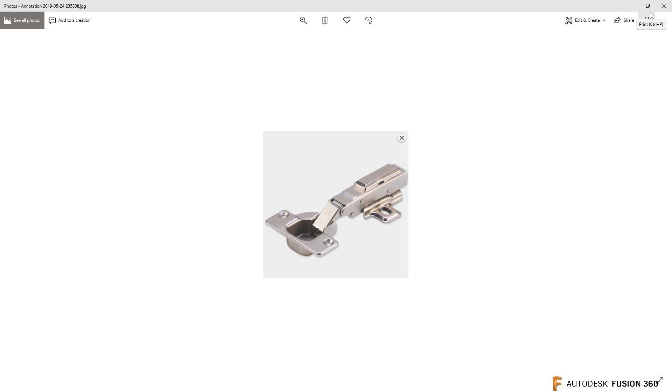So what I would recommend doing is I would actually not model this up from scratch. If you can, go ahead. But I would absolutely go to Insert and go to Insert McMaster. Because if you go in here and you search hinge, now again, I don't want to encourage anybody to cheat on that test, but there are actually cabinet hinges in here, which is pretty much what you are looking for. And there's all different kinds in here.

You can kind of filter down the different ones, but here is this same type of style, I think, that was shown. And if you go in and look at those, whenever you see CAD for digital drawings, you can actually find one of these hinges. So if you click on whatever size you want, you will see there's all the different sizes. You click on the part number, and you click on the product detail right here.

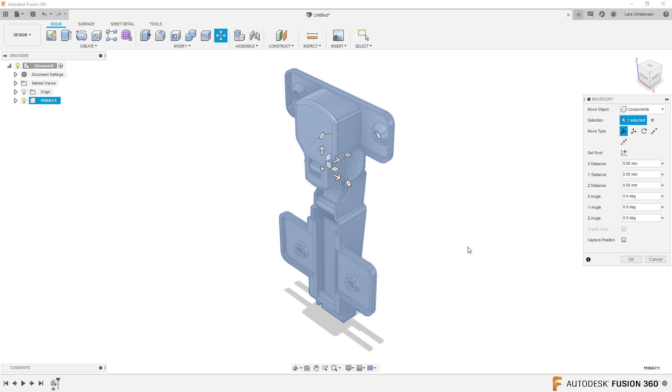Then you can go in, and if you scroll down, you will see here that you can download them as a STEP file. And if you click that, hit save, then it will actually appear on your screen inside of Fusion 360. And you can see they are very detailed in here. Now, they are coming in as a component with a lot of bodies in it.

Making a toggle clamp move in Fusion. If you go and you search on that video, this one here, Fusion 360, make a toggle clamp move, that will show you exactly what I would do to make this one move here. So that's my answer to the first one here.

Behave, I'm sorry if I'm pronouncing your name wrong. That's what I would do if I was working on a project. And again, I'm not encouraging you to cheat, but I will tell my teacher that, hey, that's how they will do it in the real world. They will go out and borrow the model and then make it move with all the different joints. Hope that was useful. Let's move on here.

So if we go back into the list here of the latest videos, we did a video last week that was how to create a custom CAM tool within Fusion 360, and this was Alex who sent me an email and says, hey, how do we create a custom tool? And we ended up creating a custom tool that in the end we could simulate running down the part here.

But I didn't answer Alex's question all the way. So I should have read a little bit further down. Sorry if I'm not reading these emails all the way into the detail. But pretty much what Alex was trying to do, if I understand your email correctly, is to actually take this T-slot cutter and cut down in a piece of wood, so kind of like sinking it down, and then cut a blind T-slot hole and then get out of it again. So just plunging down and go out.

I'm assuming you're doing this in wood because I couldn't imagine that you could actually do this in steel. I could be wrong. I'm definitely not the world's best CNC machine guy out there. But let me just draw up what I think Alex wants, because I think a lot of people would love this. I can show you a couple of cool tricks. So I'm going to start a sketch, and I'm going to use a center rectangle, making sure it's centered, just to make my life a little bit easier.

I'm going to do a center rectangle, and let's make it like 300 by 100 wide, maybe. That should be okay. Press Q for press pull, and let's extrude this up 50 millimeters. Doesn't really matter. Now, here's the thing. This can actually be helpful when you're trying to model. If you're a machinist or CNC programmer, many times modeling things up the same way that you would machine it can be helpful.

So I think, all right, I'm going to plunge down with this T-slot cutter. So I'm going to create a sketch on the top face here. C for circle, and that's going to be a 50 millimeter diameter. That was the cutter we created in last week's video. If you go and look for the custom tool, you'll find it. I'm going to hit Q for press pull, and go down minus 20 millimeters. Okay, so we just have a hole here. If you have used Fusion more than a few weeks, you should feel pretty good about this.

Now here's the cool thing I wanted to show you. So this is the tool just going down in Z, just plunging right down. Now we're actually going to have it moving in, I guess that would be the Y direction here. If we spin it around a little bit, we got the Y axis, so moving down here. So what I'm going to do is I'm going to open a sketch.

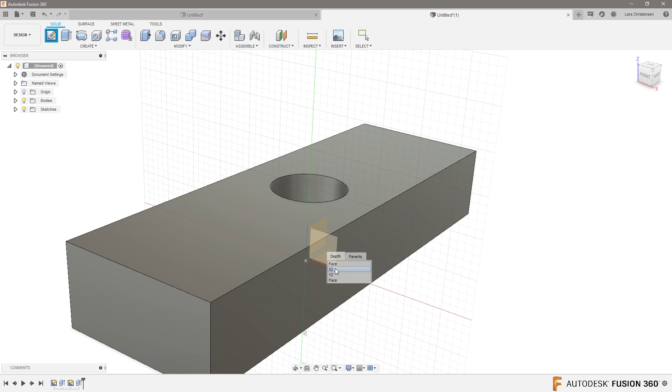And by the way, you see how I can't select the planes because the block is in the way here. Many times, and I do this too, you might just go up here and click one of the faces and find it. But if you hover where the plane is, you can see that the side of the block is selected. If you hold down your left mouse button for just 2 seconds, this little dialog box comes up, and now you'll see that I can find it right there. Click on that, and it's ready to start a new sketch.

Now here's a tool that I don't use often enough. When you start a sketch, remember, we're actually sketching right there inside the center of that hole, right? If you didn't know this, there is, in your sketch palette when you are in a sketch, a slice command. See what that just did? It just slices. It's all visual, it doesn't do anything physical, but it makes it a little bit easier to see what you're doing when you tick that little box.

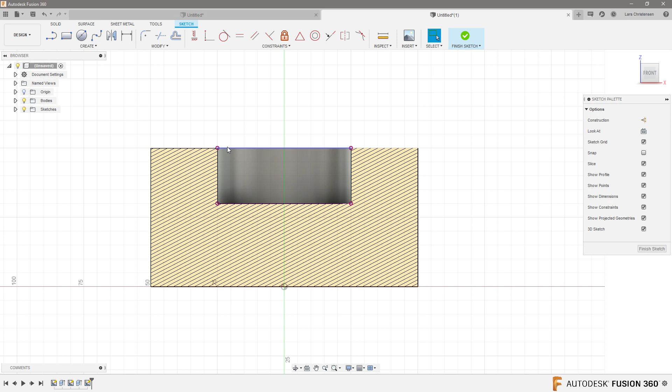All right, so I'm going to go normal to again, and I'm going to select P for project, and select that in half of this hole here. Hit OK. That will give me the endpoints here. So now I'm going to do the bottom side of the cutter, and that's going to be 10 millimeters tall. That's how big that cutter is. If I just hit OK, the box can move back and forth. We could do a vertical constraint from this point to this point. Boom. So then we have that there.

And then we're going to do the shaft. Now, Alex, I'm assuming that you have some kind of a cutting edge on the shaft, or you're going to have problems, but maybe you do. So let me just draw a rectangle out here in space. This is another thing I many times do, and it doesn't really matter how tall I make it, maybe 25. The width, I remember, was 20. I just draw my rectangle out here, and then I can use something like the midpoint constraint to put it where it belongs. I hope this is useful.

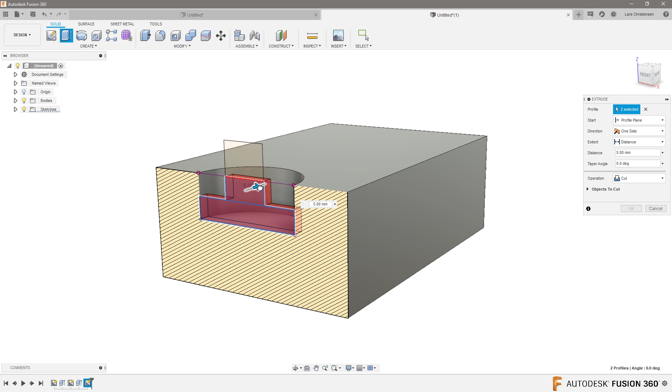So now we have that profile of that T-slot cutter. Now if I hit Q for press pull, I can select these 2 sections here, and make that cut that the T-slot cutter will do, right? So I'm going to go in about 5 millimeters cut right there. If I hit OK, you can see what we got here. So we plunge this down with a T cutter, and now we are cutting along Y. But of course, it's a round cutter, so the end here is not right. So let me just do that.

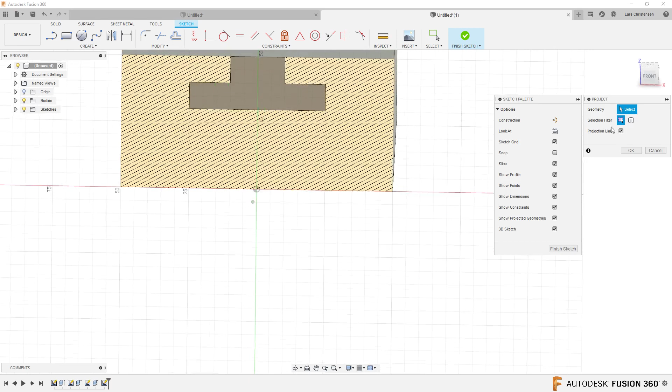So I'm going to open another sketch on that face, and I'm going to use that slice command again, because now that I remember it, I actually like that, because I can see this here. I'm going to use P for project again. When I go in here and select this, I can select this profile here, so I can get that line there. I just really want this line right here.

And then if we hit L for line, we can draw a line down to that endpoint there, because having just added that line should let me go into a revolve and select only half of it, revolve around that vertical line I just did, and that will make that half of the cutter there. If that went too fast, I apologize. This will come out as a recording. Go back and watch that recording.

If I go into the tools, into inspect, and do a section analysis, maybe that would help, right? So if we just do that for a second, the cutter's going to cut down and it's going to cut over to the end piece here. So this is the profile of what we want the cutter to do.

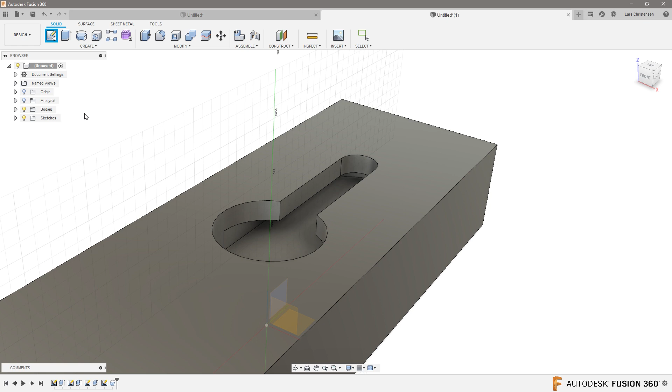Let me just turn that off again. Okay. So far so good, Alex. So now we want to use that T cutter to plunge down and machine over. And my one original thought could be if I just went back into a sketch tool and draw a sketch on the bottom here and hit L for line and draw a line from the center point of the big hole to kind of the center point of the little hole. This is kind of what I want the tool to actually

move down. So now, if we go into manufacture, to our CAM, and I'm just going to make a setup, and this is why, if you wondered before why I drew everything in the centers, because now my origin is, I don't have to mess with that. You could think about going in and use something like the trace tool here. So the trace, let me just do that again, that was a little fast. On the 2D, go and click Trace.

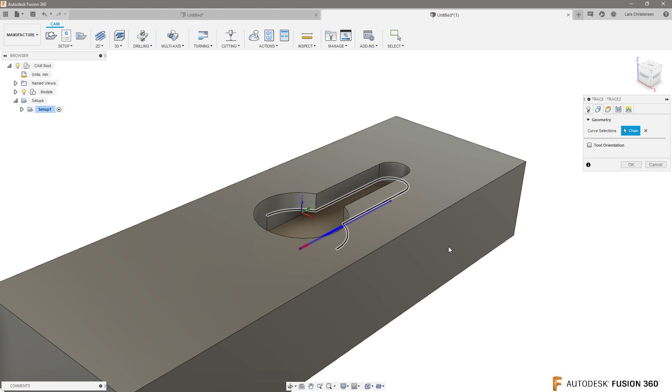And now, if I go and select that tool, and I still have that from last week's video, so Alex's form mill, what has like this T-shaped cutter here. If I select that, and I go to our curve selection, and I select this edge, and hit OK, let's look at what we get.

We are almost there. If I go in and simulate this, and I'm just going to turn it down a little bit in speed, it's going to plunge down, it's going to machine over, and this is everything I think Alex wants, except the last thing, what is that is actually rapiding out. See, this could be all good, going up again. The going up is not good. Can you see that? It's machining down, it's all good. Going up is not good.

And I'm assuming, Alex, that you have some cutting edge on this, or you're going to have to machine yet first. Now, if this is true, if this is what you really want, except the z-axis move up, then I'm assuming you're machining in wood, because I could not imagine that you could do this in steel. I just couldn't picture that, where the chips would go and all that stuff. I think that could be an issue.

Now, and it's important to remember too, I think. And I know I say this in a lot of these, but the CAM inside of Fusion 360 is based on metal subtractive, standard CNC kind of milling. So I think that's important. So if you are working with wood or other materials, you're kind of aware of that, because you might have to think a little bit different in those materials.

Now, if this was steel, the way I would do this was I would actually use a cutter that was smaller than what you're trying to machine. Because like I said before, there's a couple of things when it's steel. First of all, you need to get rid of the material. You would also need, normally you want to lead in and lead out, where the cutter actually comes on and off the cut.

And just to show that, instead of changing the tool, because that was kind of created already, I'm going to do it with making the hole a little bit bigger. But Alex, I'm going to come back. I'm going to show you how we could cheat and do this with the trace tool. But let me just show the other one first, and hopefully I'm not making things too confusing. So I'm going to just suppress the trace tool for a second.

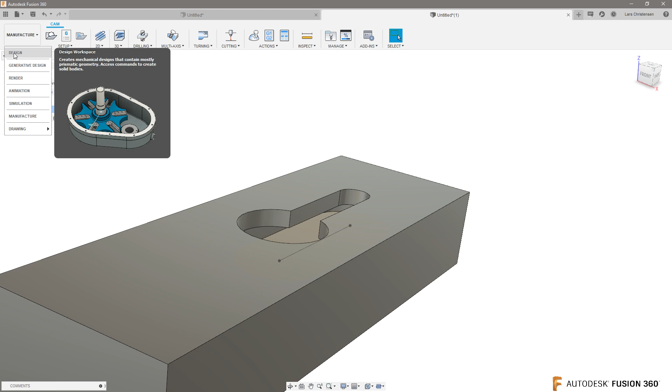And let me just go back into our design, and let me just change a couple of these, because you would have to have either a cutter that is a little bit smaller, or of course something that is a little bit bigger than your cutter. So I'm just going to go in here, and I'm really just going to change a couple of these dimensions here, because Fusion actually knows where and where not there's material. So let me also just change the width of this. So that's making everything a little bit bigger.

The way I would machine this normally would be probably just using a 2D contour toolpath. Still use the same cutter that we had before, but now I've made everything bigger. Then I will just select that bottom edge there, and let's just hit OK and see what we get.

So when we do that, you will see that we get a warning on it, and whenever you're getting a warning on a toolpath, right click and hit show log. And it will give you: contour was not machined because the given lead parameters would cause collision. See, this is one of the cool things about Fusion and being inside of a solid modeling tool. It actually knows it will collide.

So let me just go into the 2D contour, hit edit, go to the last tab, the linking tab, and let me just turn the leads in and leads out off. And let's try again. And now you will actually see we don't get a warning, and if I click here, you will see that we got some bytes, which tells us it's doing something. So let's simulate that. It plunges right down where we don't want it to.

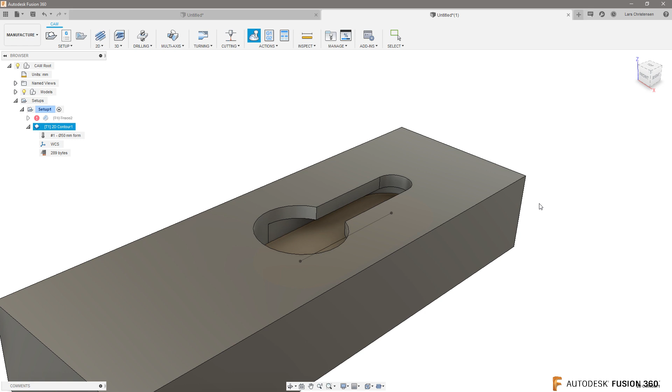Okay. So let's go back in, right click, hit edit, go back to the linking tab. Now down here you can actually do an entry position. So let's select right there, hit OK, and let's see what we get now. So this would actually probably be a better toolpath.

Now, you will normally have a lead in, lead out on your parts. And that lets you do cutter compensation in the controller of the machine. But you will actually find on most of your machines, at least in my experience, you can go fairly small in your lead in, lead out. So the default here was 5 millimeters. If I change to 0.5 millimeter, you will probably see it will actually let us do that. But what that will do, if I zoom in, is the green will give you like a little lead in and lead out. That, at least if it's steel, is probably a little bit better way to do that.

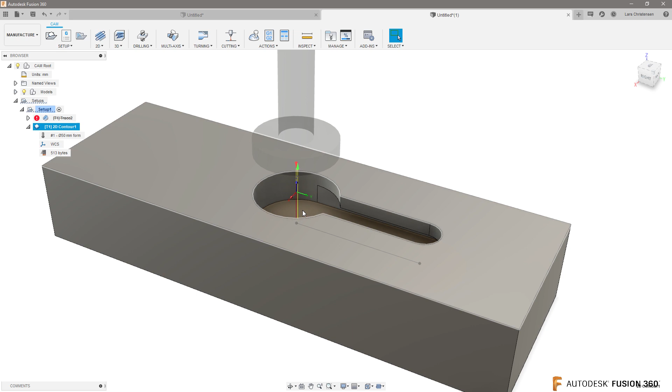And again, Axel, I'm assuming certain things. I'm assuming that you have a cutting edge on the flute here, or you would have to remove this here with a previous operation, which you maybe already have considered. But this here would be a better tool path. I do get a red collision going up. But the fact that it has a lead in, lead out, and it's smaller than the exit opening, with the material maybe going somewhere, something like that. Okay, so I got that out of my system.

Let's go back to the tracing operation again, though, because I do want to show you something that maybe is useful. If we go back in and we unsuppress that and just regenerate it again, still the same thing we have right now in that tool path: if I simulate it, it's going to go down and go on, and then it's going up. And this is what I think you want to get rid of. You want to get rid of the up, per se.

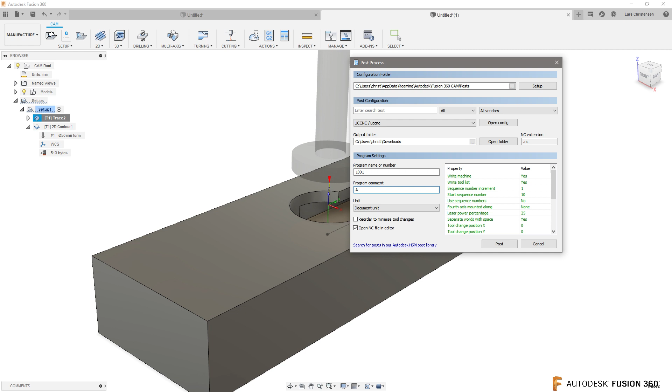Well, you could actually do this in the code. If you had to do this every single day, maybe this is not the right way to do it, but if you're just making a few of these, we could right-click here and go into the post-processor. Now, with great power comes great responsibility, but I'm going to show you anyways. Let's change the name. I don't know why we have Nathan in here. So Axel's, I'm just going to post this code out here. And of course, this is a tiny little piece of code. But to do that trace tool path, this is what the machine needs.

And when you get past the G54, turn coolant on, turn heights on, it plunges down in this line, and then it goes Y80 millimeters right here. That is actually when it's traveling across there. Let's see if I can move it down a little bit, like that. So this line here, line 18, Y80, that is when it's traveling to there. Then you will see the next one is Z up. Well, Z up means that it's just going to travel up 4 millimeters, and then it's going to travel up another 15 on top of that.

What we could do was we could go in here and click on this, hit enter, and enter our own line. And if we here wrote Y0, because that's where it started out from, 0,0, that actually means that now it's going to go up, and then it's going to go back again. Now, you will not see it inside of Fusion. You will see this on your machine.

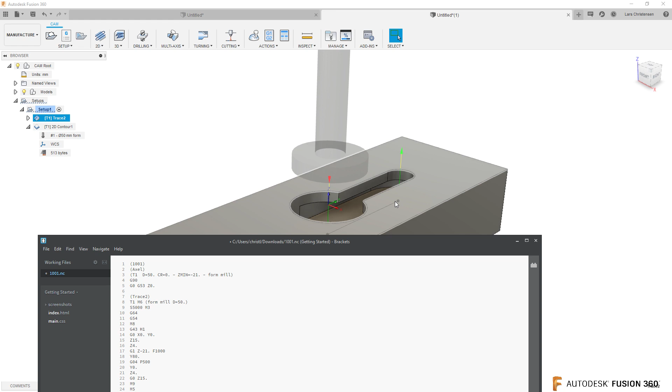And you might even consider, if we make a line between those two, the Y80 and the Y0, if you did something like G04, that's a dwell, and we did like P500, that will, depending again on your machine, give you a half a second. A G04 will give you a dwell of a half a second. So that will just let that cutter go Y80 down and just sit there for a half a second to make sure that it spins around a couple of times before it goes back again. So you could get around it by doing it this way here.

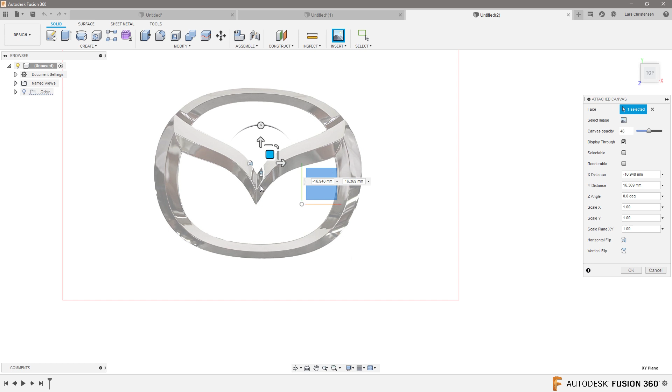And of course, when you bring it in here, we talked a lot about logos, you get an option to manipulate them in here. I'm a big fan of doing the opacity level here, leave that around 50 or so. And another thing that is good, if you move it around, is to get that origin situated somewhere; that can be kind of helpful. So what I wanted to show you, JC, is that instead of using lines and arcs to do these kind of things, you're probably better off using the spline tool.

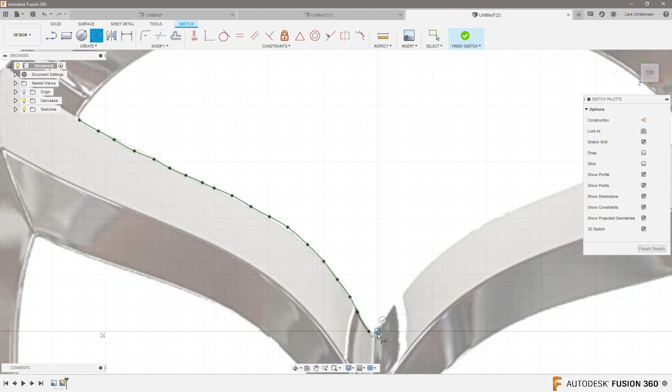So if I go in here and create a new sketch on this face here, the spline tool is a little bit better. Now, what many people will do with the spline tool is they will click on the spline tool and then select somewhere around here and start clicking around multiple times. I think that was how we used to do it in the olden days maybe. So people trace it around like that. I actually am not a big fan of doing it like that. Control Z to undo. Let's go all the way back.

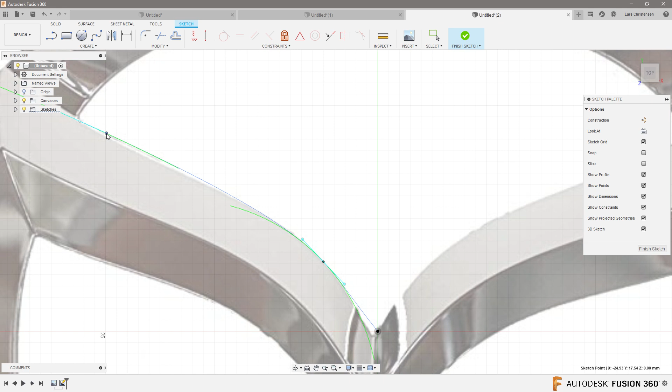What I will do for this one here is probably just click once and then might click twice. Might click here and then one down here near the bottom. Probably right around there and hit OK. Because what you get is these handles, and they are much better to control the spline width. And you can kind of adjust them. The more you get of these, the harder it almost gets. But this would be one way to play around with the spline here.

Now I didn't do a very good job placing the canvas on that origin, did I? That's probably better right there. So I would adjust these spline handles as you're seeing here. Let's go back and edit it again. I would be playing around and try to match this up with our point here and get it as close as you want.

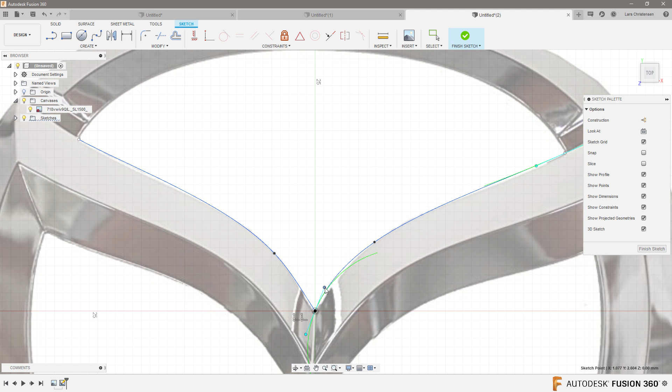When you got this all the way around, now these, I always talk about how you're going to turn your, yeah, let's just do one more. So I would do one for there, and adjust that one to be somewhat close to, see, that's pretty good.

I'm always talking about you have to fully define your splines or your sketch geometry. But for splines, I actually don't do that. Let me just get the last one here. So you get that, JC? This is how I would trace around each of those. Yours is a little bit more complex than this.

But then in the end, when I've done this, I would right click on each spline and I would fix it. Fixing the spline in the end is a much better way than trying to fully define them. Oh, I'm not sure I got this one fixed, but whatever. That's how I would do that, JC. That's how I would go ahead and work with that. Hope that was useful.

Another option could be if you can get your logo. Your logo looks like it's a pixelated image. You could use something like Adobe Illustrator or another program that can convert from raster to vector. That means you can break down a picture that is all pixels into actual geometry that is lines.

And then you can bring that SVG file into Fusion by clicking insert and bring that SVG file in right there. That's another way to do it, if you don't want to sit there and trace it around. A couple of different ways to play with it.

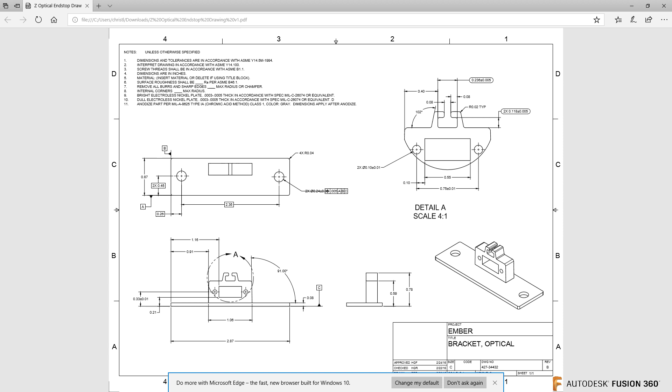You can see that, okay? So what I could do was use something like this snipping tool inside of Windows, and I could just grab this 2D drawing like this, because a PDF, unless it's special, is not really better than a picture. So let's just hit save, and leave it as a JPEG capture, just so you see it here.

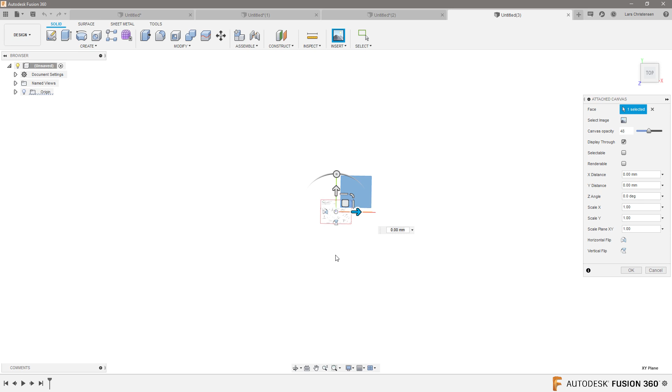So now inside of Fusion, what I could do is use it as a canvas as we used before. So I'm going to go over here and click insert as a canvas and bring it in just like we did with the other ones. Now it's a picture. Now I'm going to do a couple of things in here with it though. I'm just going to place it in here for right now. Hit OK. Find a reference.

Ooh, and this is not millimeters. This is inches. So I'm just going to switch my unit over. It shouldn't change anything for what we're doing here. Change it over to inches.

When you're bringing this in as a canvas, you can actually right click and calibrate that canvas. So if I click right inside of this hole here and inside of this hole here, I can type in that 2.36 you see right there. That will blow it up much bigger. So now this drawing is potentially pretty dang close to my actual file.

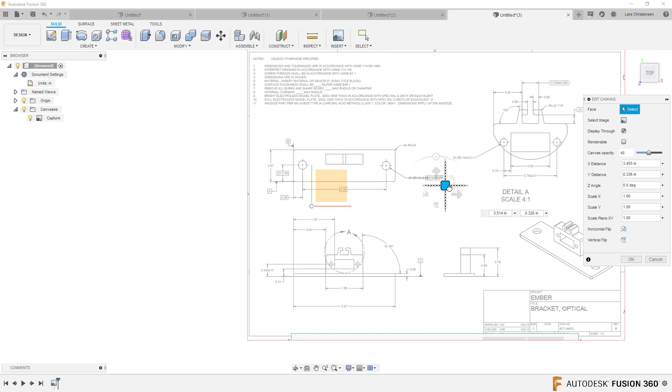Now I will right click again, hit edit canvas, and turn my origin on. That's my origin. And I will move this one over close to one of these views. A print like this, if you're fairly new to mechanical prints, has different views. So this is the top view, there's a front view, and there's a side view on this bracket, whatever this thing is. And actually I just noticed that I think we are missing a dimension on this for where this island is. Alright, that's for something else.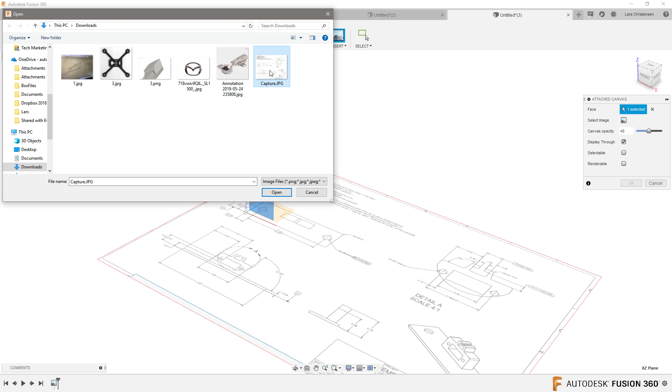So what we have now is this PDF brought in. It's sitting on the top view. It is to size, because we just used that calibration function. What I would now do is bring in another one. Insert, attach canvas, select the front face here, select the same file, hit OK, and again I'm going to hit OK. And now that is sitting down there.

Now this actually adds a canvas. I actually need to flip the orientation, I think. It looks like the orientation on this one is wrong. If I click on this one, that will make it go that way. There you go. You can flip the view on these two here. You'll see what I mean in a second. Alright, so this is the second one. I'm going to hit OK to that. I'm going to do the same thing to that one.

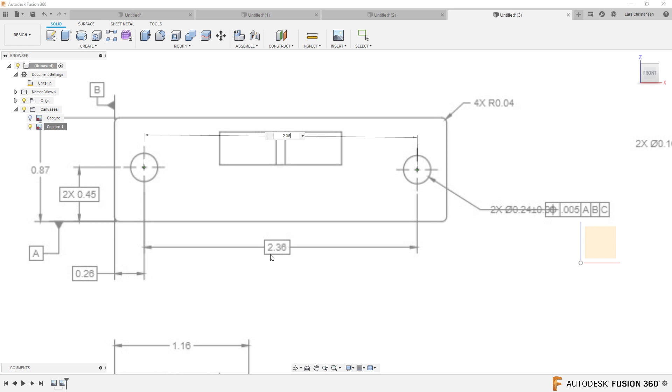I'm going to turn the first one off. That's a little bit hard to see. I'm going to calibrate that one also, using the exact same dimension I did on the first one. Click this here. Get as close as you can. Again, that is 2.36, that dimension right there. That's going to blow up.

And then I'm going to do the same thing. I'm going to use the same corner, but on the view I want to use. So instead of placing the origin on this edge, I'm going to do it down to this edge, because that's the front view we're on right now. I hope this makes sense. Hit OK. So if I now go back up to an isometric view and turn the first one on, we have the front view lined up. We have the top view lined up.

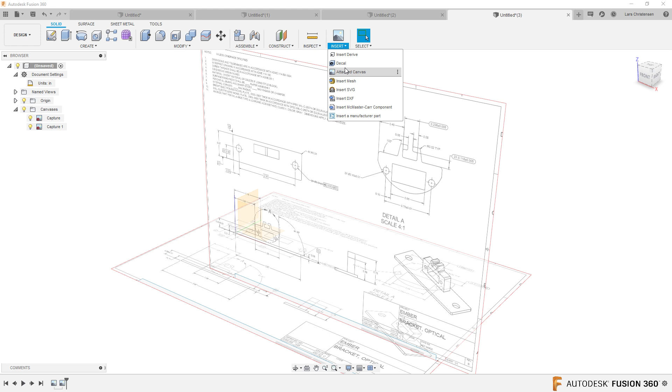We could also line up the last view, depending on if you need it or not. We're just going to do it for this exercise. So we're going to insert one more time. Last one, I promise, friends. This one again. Hit open. So that comes in. I'm going to turn the first two off again because it's a little bit hard to see. Let's zoom in. I think that is the right one. Oops. Go back over and look at it. There it is. Let's right click, calibrate.

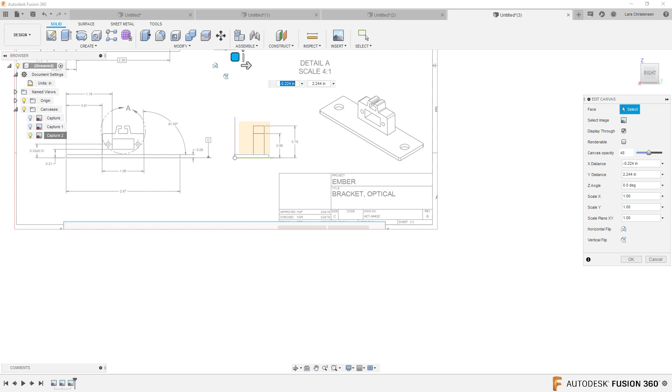Like that, 2.56. And this one here, when I right click and hit edit canvas, it would actually bring it up to this view. Now, one little tip: if I was going to do this in real life, I might actually just delete the other things out of here and only keep those three things we really need.

So let me just rephrase, right? If we go to the top view, we really only want this section here. The front view, we probably only really want this view here. And again, the side view, we only want this portion right here.

Using this technique may take a little bit of work up front, but it has made me catch things in the past that I missed, versus just having a paper version laying next to my computer and referring back and forth between the two all the time and missing something. So I think this is a pretty good way to do this.

So what we could do now with these three canvases is, and you maybe have figured it out, open a new sketch, click on this one here, and draw up a rectangle. Now, I would still use the dimensions you see on the print. So 0.87 for one, and the overall size of the other one is down at the bottom view, but it's 2.87, like that. So now we have that there.

There are some holes, C for circle. So place a hole here, and the hole is 0.24, like that. And then D for dimension. So you see what I'm doing here? I'm just using this PDF as a reference to draw up this circle.

C for circle. I'm going to draw another circle over here. Then I would do an equal between this circle and this circle, and probably a horizontal relationship between them. And then D for dimension, and the one we have been using a couple of times here is 2.36, right? So I'm modeling right on top of this. I know for some people this is going to seem a little silly, but to me this has been an extremely helpful way to do this.

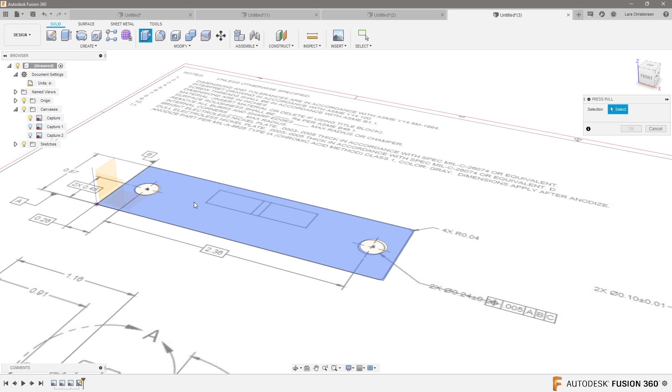Now you can continue, and we could go down. The thickness of this is 0.08. So here's Q, extrude 0.08. So that gives us this view here. Now, if we turn that off and go to the next view, see how we have the next one sitting right here?

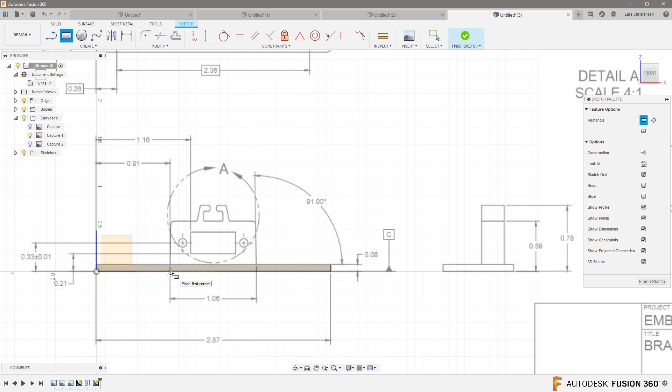I could open up a sketch on this front view here. We could do all the details because there's a detail view up here, but let me just draw a rectangle here using the dimensions, actually from the bottom up. It is 0.78, D for dimension. And what are we looking at here? The width here is that one right there, so that's 1.06. So you see how I'm using this as a reference.

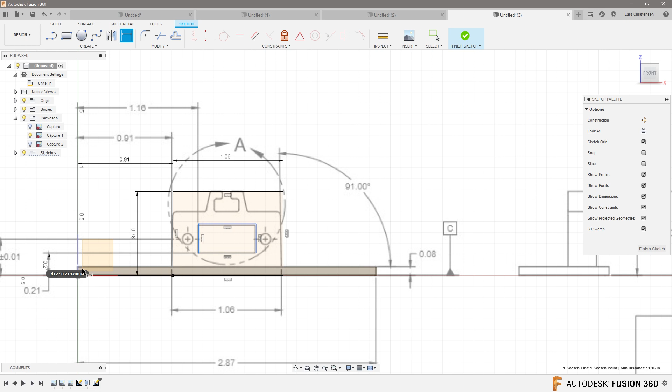There are some dimensions here. The dimension from here to there would be 0.91, right? So now that is in place. We could do the opening inside of it. C for circle, draw that circle up there, and from the bottom up that is 0.21. And from this edge to there is 1.16, right? So you see how we're placing it.

Now maybe we have to go over to the detail view to see it's 0.55. There are some things missing on this print, though. 0.55, like that. And what's the overall width on this?

I think that's missing. Oh no, that's this one here probably. From the bottom and up, goes over there. 0.59. That's not true. That's the top. Yeah. So we're missing, I don't know what this one's gonna be. We're missing a height on this one, I think. We just leave it here.

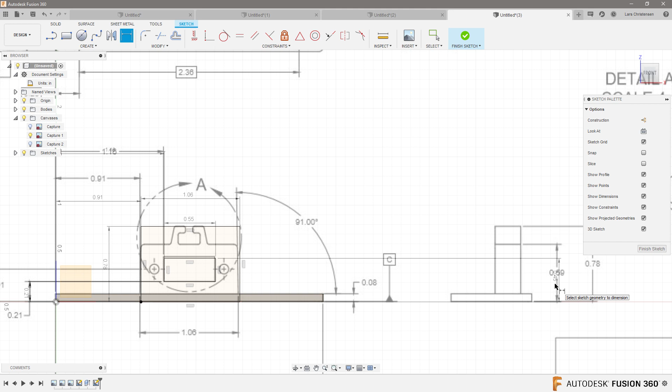Now the last view, and I did this kind of on purpose to show you. See, if I turn it off, you see how this sketch is sitting here? But if I'm turning on the last view, you will actually see that it's offset. It starts over there. And that dimension is missing. But just in case you didn't know, if I hit Q and I hit that, you see how we can do that there. Did you know that in the standard extrude function, we can actually do a starting offset from?

So if I do like 0.5, minus 0.5. See how you can actually offset that? So if you go in and look at there, maybe it's not 0.5, maybe it's 0.457, I don't know. You can play around with this, but if you didn't know that, you can offset that in. And I don't know what the thickness is of this one either. 0.258, close enough. Minus 0.258. All right.

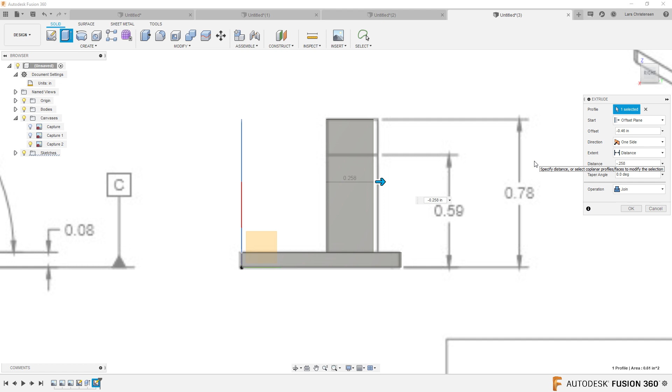This is one way that you can start using PDFs inside of a file to draw things up. And of course, if you're missing dimensions, David, like I do here, you probably have to call the customer and make sure that you get that straightened out. But if you have all the dimensions, this way of using PDF files is something I have used multiple times when I'm modeling things up. And even if you are a bit of a pro, this is a great way to catch those things. Like I'm doing here, suddenly you realize, ooh, I'm missing this dimension. It's actually an easier way to see it, I believe.

I do not, but I might be able to help you. If we go back in, let's start a new file here. So one thing about the mirror command. S key, let's do something that is 200 by 300, Q, press pull, 20 millimeters thick, so we have a plate. There's a couple of different ways you can mirror, right? So I'm going to open a new sketch here, and I'm not going to fully define this. I'm going to extrude this up. Yep, that's fine. Let's add some fillets to it, just to make it a little exciting.

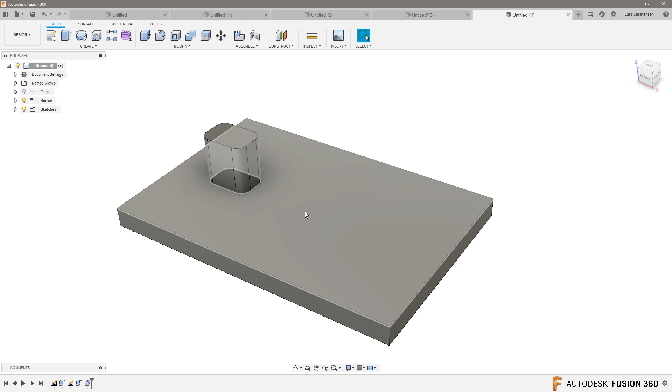Okay. If you use the mirror command here, first of all, you get different options in here. You can select faces. That's kind of like the default. If I select faces, I can go around and select all the different faces that I want to mirror. I think that might actually be purer for Fusion to calculate. But what I prefer to do is selecting features. It makes it easier for me so I don't forget to select something, because now I'm just going to select it down here. So I'm going to select these two features to mirror, a mirror plane, that could be this one here, and it will come over here.

Now, this is maybe what to play with, John: there are compute options in here. There's one called optimized, one called identical, and one called adjusted. You might want to play around with these, and it comes down to how Fusion is doing the calculation.

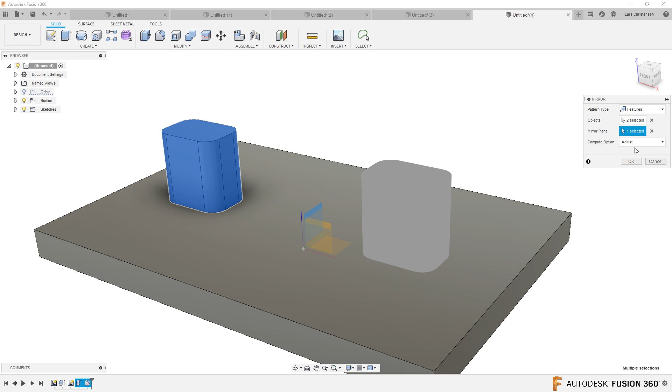Now, to my knowledge, other CAD systems that I've used would normally not give you 3 options in here. It normally just defaults to 1. So the optimized one is going to be the quickest calculation, and I don't understand all the ones and zeros behind this. The identical one is a little bit slower, and the adjusted one is the longest. And I normally select this one just because normally it's not a matter of time unless you have something very

complicated. But what the adjusted one does, as far as I understand it, is that the optimized is the quickest, identical is a little bit slower, and then the adjusted is the slowest. And it's because the adjusted one will calculate every single face and make sure that it solves. Because remember, with solid modeling like Fusion 360, it needs to solve everything in the end. And that's also what sometimes gives us some trouble.

John, I hope that was useful. All right, let's move on here.

It is Sunday. Sorry, it's Monday. It's Labor Day. I didn't get to do any live streams or answering my emails yesterday. I was outside. I got my deck stained. I got my front porch painted. I was super active yesterday. So now I'm using this holiday to answer some emails instead. Why not?

Next one is from Chet Israel. I have a question about Fusion 360. What is the best way to import an STL file into Fusion and then get it prepared for 3D manufacturing on a wood CNC router? Okay, so I'm going to pick out a couple of things of this one, Chet. If you're into STL files, 3D printing, or CAM, I think you might like this.

So what I'm going to pick out of this is the best way to import an STL file. I'm going to talk about how to get it prepared for 3D manufacturing. So let's jump in and take a look at this. I'm going to open up a new file, and I have an STL file that I've been using in some different videos. The best way to bring in an STL file is to go to Insert and say Insert Mesh. And by the way, whenever you're working with 3D printers or STL files, the best thing is just to work with millimeters.

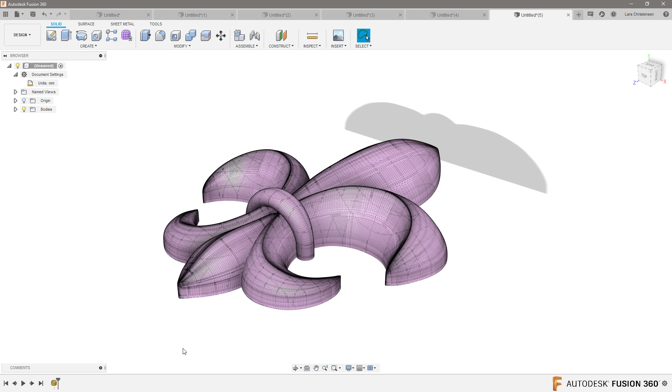Actually, for what you're trying to do, Chet, this is okay because you can machine mesh files inside of Fusion 360. This is just a mesh file. So let me show you that first. But if you are into 3D printing and working with mesh files, don't go away because you're going to like what I'm going to show you. You said 3D machining. You can use all the 3D machining tools inside of Fusion. It actually works on mesh files.

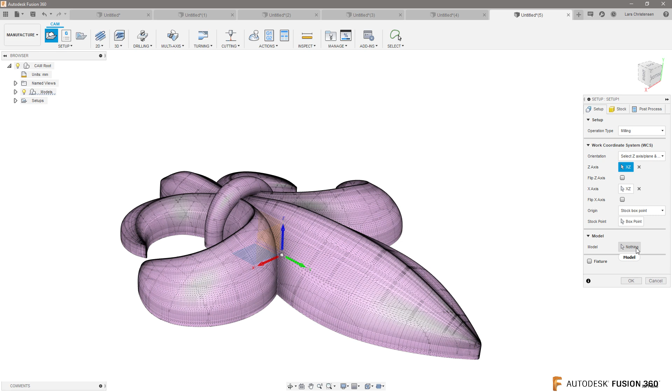The trick is that when you select your setup in here, of course you got to do all your work, like make sure you get your Z-axis the right direction and all this stuff. But the trick is you have to make sure that you select the model in the setup and select that mesh file. It needs that to know that it's machining the mesh.

And then you also have to go in and work a little bit with your stock in here. You can see the stock is a little bit off on this, so you have to change that too. But what I'm trying to get at is that all your 3-axis toolpaths will actually work with a mesh file.

You just got to remember, like I just did, to click on that mesh file there in the setup. You got to select that mesh file there. But you can see that it throws all these toolpaths on it. You can completely machine it, 3D machining it.

So I hope that was useful for you, chat. But I want to get back to it again, though, because it's not 100% fair for me to just stop there, I feel like. Let me go back in and open a new file, because I want to talk a little bit about mesh files. If you want to bring in a mesh file, an STL file, and it's big, like the one I have, there's actually a couple of tricks to it.

One trick is to go in and turn the history line off. So right-click up here on the top, click Do Not Capture Design History. That will get rid of the line down here. Now click Insert, Insert Mesh, select that same file. Okay, hit OK. Now what you can actually do is you can right click on it and you can say mesh to B-rep. And what that means is bringing an STL file to become a solid.

Now, why would you do this? Many times we're doing it for the simple reason to, excuse me, and now the sun is going away again. The simple reason we will bring a mesh file in to become a fully solid is so we can cut holes through it or cut it in half and do different things with it. It's not always necessary to do, but if you want to manipulate it, you probably want to get it to a solid.

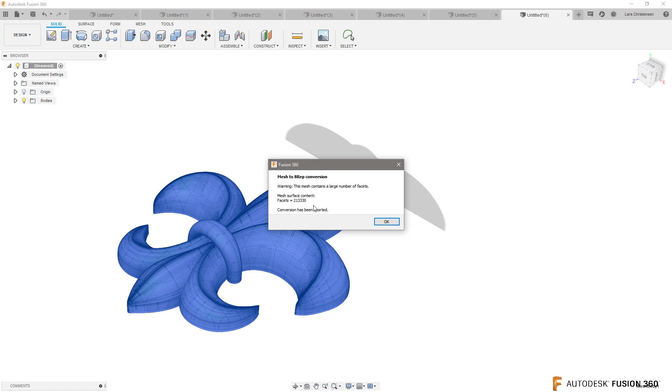Now, when I do that here, though, I'm going to select it. You will see that the conversion has been aborted, and the reason is that when I brought this one in, look how many triangles there are. 213,330 triangles. I said this was a pretty big mesh file. To me, that's a big mesh file. We need to bring it down, I think, to around 15,000 or so. We can do that inside of Fusion, actually.

If you click on your name, click on Preferences, go to the preview, and make sure you have the mesh workspace turned on here. You have that turned on. We can right click on it here, and actually, I think we have, right click, and if we go, do we do convert? No. Right click. Oh, here they changed it. Up here, whew, getting old.

Up here, there is a mesh toolbar because of the new interface. When you have a mesh body in the screen, the mesh toolbar will appear, as you just looked up here. And in here, you can reduce the triangles. You will see that I have kind of like the paintbrush selected here. So I'm going to change that to a window. Select the whole thing.

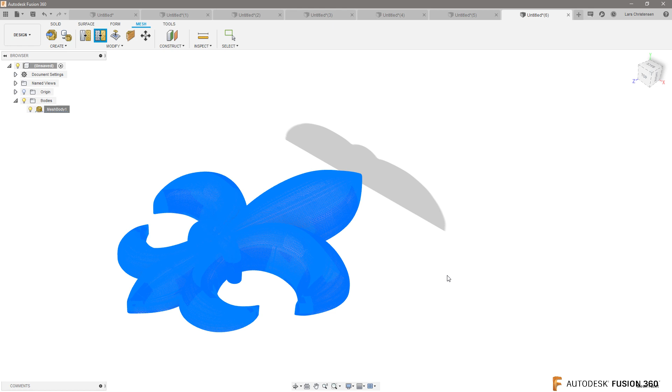And then now you can reduce the triangles. Now when you do this, it will get rougher. So let's just hit OK to this one time. So you will get less triangles, which means the model will physically change. It's kind of hard to see right now, but if we go back and try what we did before, let's get back out to solids, right click on this and say mesh to B-rep, hit new. You will now see it's down to 53,332. Conversion has been aborted, so it's still too many triangles here.

And I've done a lot of live streams on this. If we go back in again, reduce it more. I would absolutely be playing with the density here to see what the limit is. I'm going to run it again. Let's go back into solid and do it one last time. B-rep. You will now see that it's 13,332. And it says it's still large, but it can actually do it now. And it can turn it into a solid there.

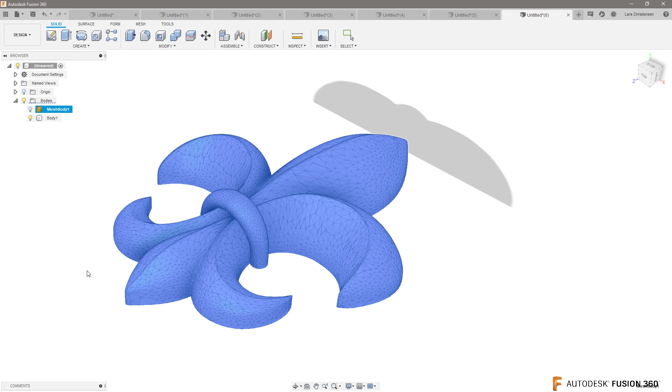So chat, I hope that this was useful for you. So now you actually have that. Now it's a solid model. Now it has all those facets on it. You can change some of those with some of the mesh tools. That's another video.

But I hope, chat, that this was useful for you, that you can actually apply 3-axis toolpaths, 3D machining, on a mesh file. You don't have to convert it, but if you do want to convert it, that is the way you can convert that there. Now you could use all the CAM tools inside of that. Useful, chat? I surely hope so.

It is Memorial Day here in the United States. It's a holiday. It's almost like a Sunday. Just getting through some of my emails here.

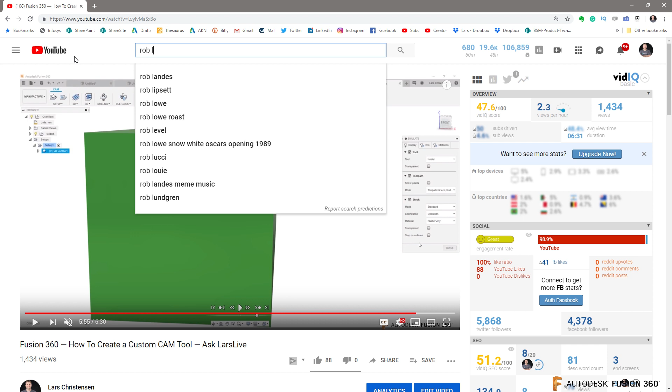Next one here is from Mark. And Mark said, "Hi Lars, I watched Rob Lockwood's video about master modeling a year ago." And then he left a link. I definitely have to show you this video. So let's go out here to YouTube and let's actually type in this guy: Rob Lockwood Fusion 360. And it actually comes up right here.

But you don't have many videos out there. Rob Lockwood is, how do I describe Rob Lockwood? Let me click this video here. You should definitely go and check out this video by Rob, Master Modeling in Fusion 360. So I have known Rob now for, I would say, 4 years, 5 years maybe. Rob is a fantastic guy. Rob is one of these guys that when you give him a piece of software, he will stretch it and find out exactly how far it can go.

He's super smart. I don't get a leg to the ground compared to Rob. He's way smarter than I am. But he has created this video. So I can't say enough good things about Rob. This video here is talking about master modeling, and it's definitely worth watching.

To Mark's question in regards to how this will change with the new, what's it called again? Oh man, I'm losing my mind. Derived function inside of Fusion. How do I think that will change? Well, it's probably better for Rob to answer this question than me. Let me just talk a little bit about what Rob is talking about with master modeling. So primarily what Rob does, and I have done this in my videos too, I'm maybe skipping one step of what Rob is doing.

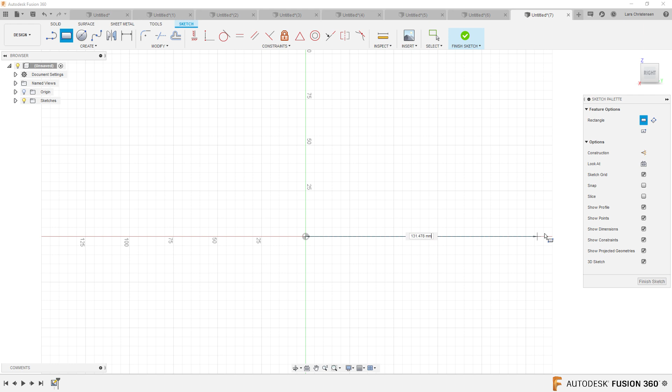The idea is that you open a brand new file and you create a layout sketch, that's what I normally call it. So let me just draw a couple of sketches here. And let's go in here and add a slot. I'm not quite sure where I'm going with this. Maybe I do need Rob to help with this. But the idea is that you create a sketch that is fully defined, that has the main thing of whatever it is you're going to model up.

Now, in Rob's master modeling video, you should definitely check this out, he saves this then as its own file. So he goes up and will click save, and I'm going to do that. Hit save, and let's make sure we put it in. I have an Ask Lars Live folder. Let's call this one Rob Lockwood. He is a super guy.

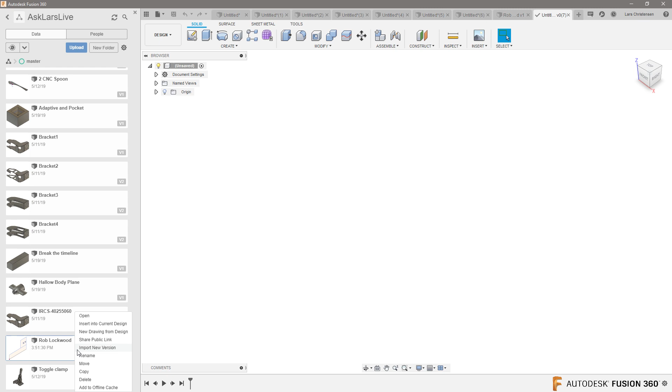He will save this file, then he will open a new file, and he will now insert that first file into it, in his video, if I see it right. So you'll go in, and it's probably got to update, there it is. So you will now right click and say insert into current design. We're going to save this file first. Insert this into this next file. So now you actually have the original file called Lockwood, and then we have this new file.

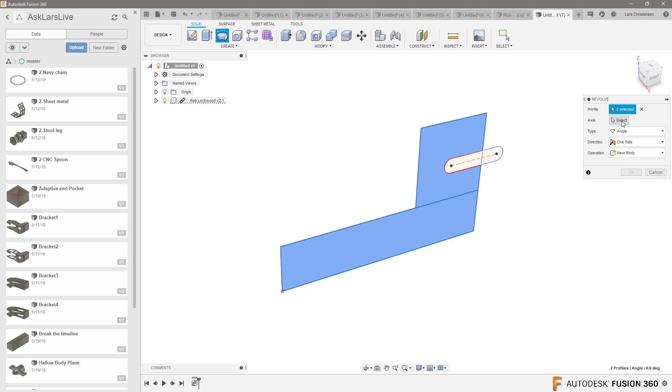And then from here, you could start doing different things. So if we go back to the original file in here, I figured that this was not super good. So I'm going to make a change and save this. That means that one will come along to this file, right? You see how I kind of linked these two files? So now if I go in here and do a revolve around these things here, in my second file I have now modeled this up.

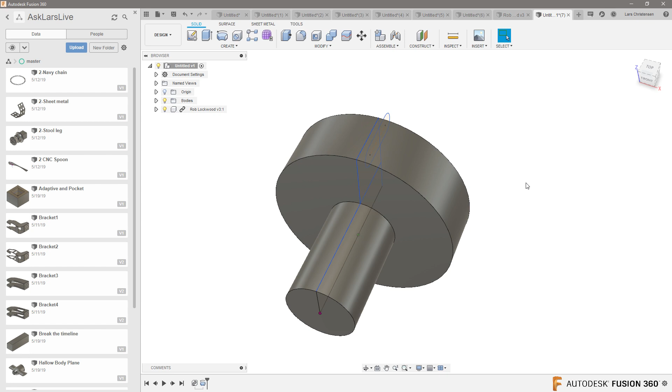And if I go back in my original Rob Lockwood file and ever change anything in here, then it will update. And what it does is it just assures that if you have multiple people working on a file, you're not messing up things when people are working on files later down the line. Watch Rob's video and you will get further.

What Mark is asking is, okay, so I have this file here. Can I just use the new derive function from that? And I would imagine that derive is in here somewhere. I don't even know where derive is sitting in here.

I thought it was in here. All right. S key, derive. Okay, it's right there. So you can find it this way. Going derived, yes. I think that Rob would probably tell you that now you could achieve the same thing by using the derived function to send this into a new design. So kind of doing the same thing through both of them. I hope this makes sense. It was a long answer to your question, Mark.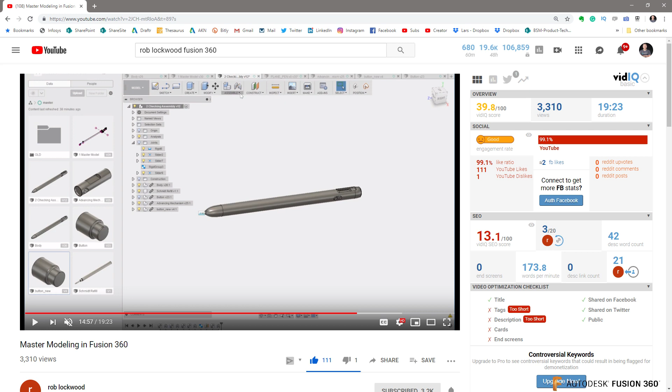I do think that Rob Lockwood will use the derived function. I would love for Rob to answer that. But yes, again, go and check out his master modeling video here. It's super good. Rob is a great guy, and I think it's really useful to think about this. What I have normally done when you've looked at my videos and using this layout is I would normally not separate the sketch from my revolve. I would just have left the sketch up in the top one up here.

I actually have a video. If you go to my channel, I actually would have a video here. Go to my channel and you go to playlists and you go to the lives when I did all the different live streams, and click up here so you get the whole list. Hang on. And the way that I'm finding things in here is actually Control F. Search, and if I type layout, I'm wondering if it will not appear. Maybe I didn't call it layout. I think actually I called it skeleton.

Maybe. Let's see. Sometimes I also gotta just look for the thumbnail to find something. It's not perfect, I know. There's no skeleton in here. What the heck did we call it? Yeah. Skeletons in the wood cabinet. If you find live stream number 112, you will see the way I normally do, kind of what Rob does. You can call it master layout, you can call it skeletons, or you can call it layout sketches. But definitely watch Rob's video. Rob is awesome, and I'm definitely not going to say that my way is better than his.

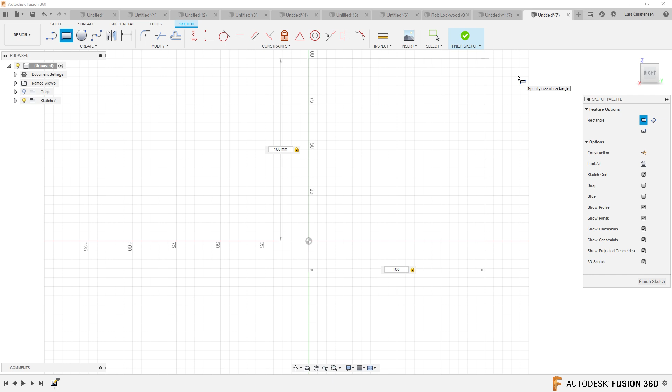So let me just model something up that is close to what was just provided here. So let's do this. New sketch, side. Let's do a rectangle that goes up like this, 100 by 100, like that. Maybe we do, that was like an arc on it. So let's do an arc like this here. Q, I'm not fully defining anything. You should do that. And then we're gonna go ahead here and open another sketch on here.

And what I'm gonna do is I'm actually gonna do a spline, because that's what it looks like, just to make it a little trickier. I didn't do a spline. I'm gonna do a spline, I said, and then I selected the line. Amateur. Oops. Okay. Because it looks like there's a little bit of bow to whatever it is that we're trying to do here. And let's just draw a line over here and close this off in good fashion.

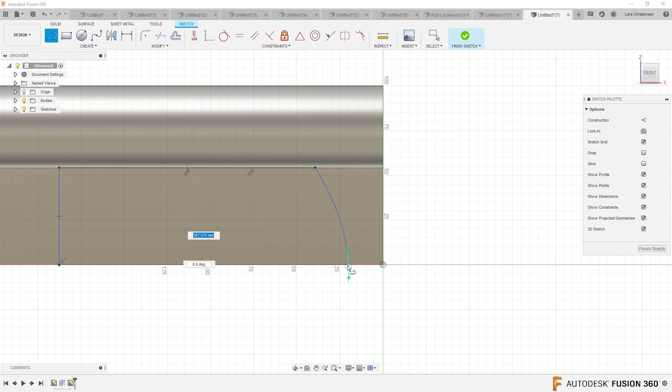Hit Q and draw that out there. Okay. So what we're looking at, this is my draw up of this. Maybe it should be a little bit closer.

If you hear a lot of rumbling in the back, I got the 3D printer going.

Okay, this is maybe a little bit better. Let's look at Simon's picture again. Kind of like a transition there in red. There's a couple of different things I want you to be aware of. First of all, the standard fillet command actually has some pretty cool functions in here. If we go to a variable radius, you can actually start playing around with variable radiuses.

What could be extremely helpful in here, where you could go in and select this line here, make that a variable. We could also select another edge. So you can start playing around with some of these. Now you might also risk that they don't completely do what you want, but this will be my first instinct. You can start playing around with these, and you can actually control the curvature on the tangency in here. You can actually also do setbacks down here, so that's a whole other kind of type.

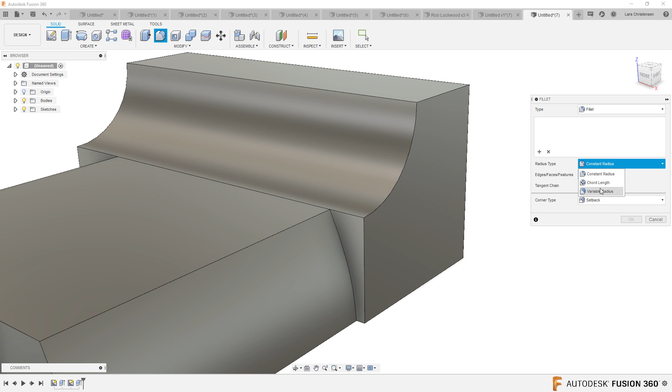If you do a setback one, and I'm probably not a specialist in all this stuff, so let's go in and select this. So you can actually go and start playing with a lot of the different ones in here. Alright, now I'm messing around and I'm not doing it right. Isn't this typical? Fillets, setback, variable radiuses. So we got this one here, so that's a variable. No, I thought setback needed a point. Yeah, there we go. Right? We need some points on this thing.

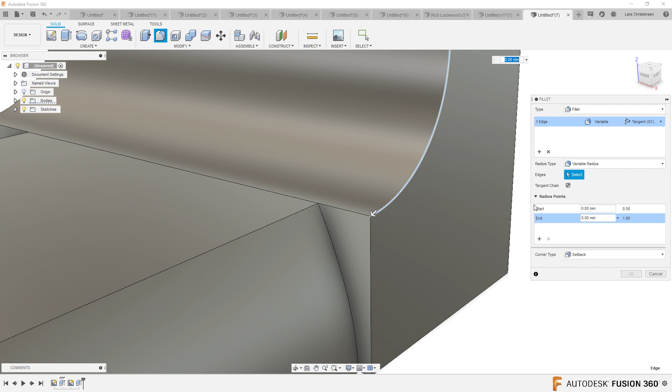There you go. So you can see here that you can, with setback edges, so let me just do that again. Let's delete these out again. Undo. So I'd probably be better off to select the fillets, select the setback, select this variable radius here. For the setback, I'm actually going to select a point here. And then now, before I do the setback, this is what happens when Lars doesn't. There you go. And now if we make that,

I'm not sure which one I'm playing with. If one of them is the fillet, I'm just about ready to abandon this. I have to do another video on setbacks, I think. Somebody right now is yelling at me. Alright, we just did it before. Okay, I'm getting an error on this. Play around with the setbacks. I gotta work on that.

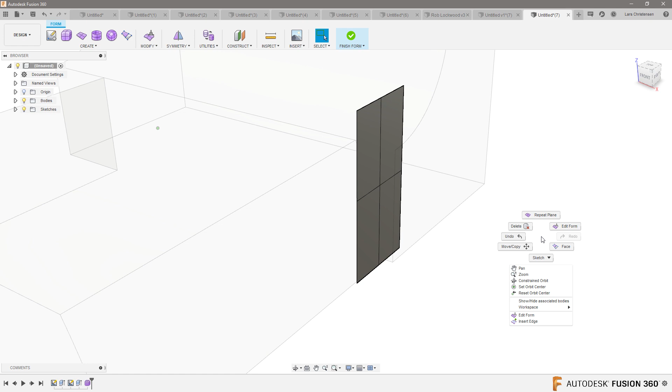The other thing I wanted to show you, sorry, is actually something that I think is more interesting, and that's using the sculpt environment to try to do what you're trying to do here, Simon. If you go into the sculpt environment, we've been in here before, and we go in and we select a flat face, and I'm just going to select on here, and I'm just going to draw kind of like a blanket, like this. And as you probably remember with these blankets, we can completely manipulate them by right-clicking and hitting Edit Form.

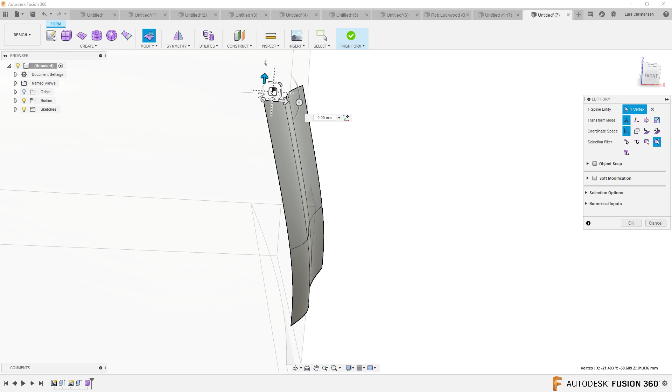And what we could do was we could start playing with kind of how we want that edge to be on this edge here. So let's just select this, and I'm going to hold Alt and just get another segment here and start dragging this one out there. So what we can do in here is we can play around with this part here. Let's move this up a little bit. And we can start making the shape that you maybe want this to be.

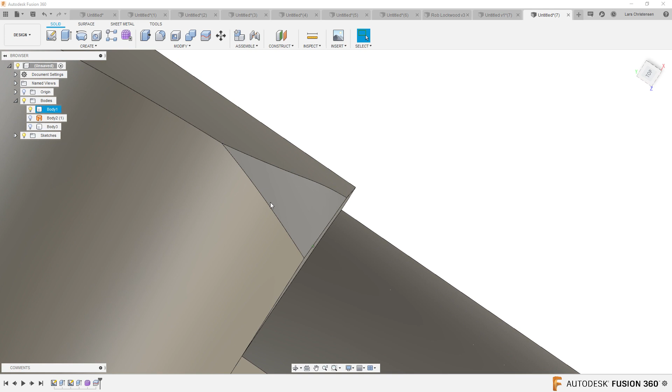So I'm just making this in all different kinds of weird shapes. And if I exit out of it, this is actually kind of a surface. And you will see if we go into bodies, this is now a surface body. Now you could do a split body and select our core body, select our face here, hit OK to cut with that, don't have extension on, and now we actually get that shape of that blanket we just did with the surface.

And if you wanted to play more with it, we could right click and edit that feature. We're right back in where we were before. Maybe we take this and we make it more bow shaped, like that. Hit OK, get out of it. So now it's a bigger piece right here. We hide that. Now you can see how you can sculpt that.

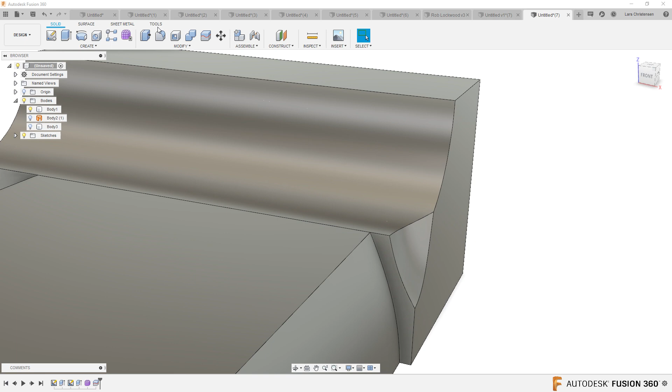I would actually be a pretty big fan of using this technique to achieve that cutout right there versus getting in and using other stuff. I hope this was useful. The fillet thing, I've got to practice a little bit more, my setback fillets, but that is also an option in there. All right, I think we're just going to run through the next one a little quick here.

What I would recommend anytime you have an issue is to go to the Fusion 360 support forum. Search that on Google, Fusion 360 support forum, and you can get into the forum and post in there. When you post in the Fusion 360 support forum, there's all kinds of people in there. It's a great place to get support. Autodesk people are in there. This is absolutely the best way. So I hope that was good for you, Chad.

All right, let me just run through the next one. Next one here is from Jesper Gerster. It looks like it's Danish. "I would like to know, how can you make text in Fusion 360?" So if you want to 3D print text, that was actually one of the absolutely first live streams I did, if not the first one. Live stream number 05, pick a letter, beginner to advanced.

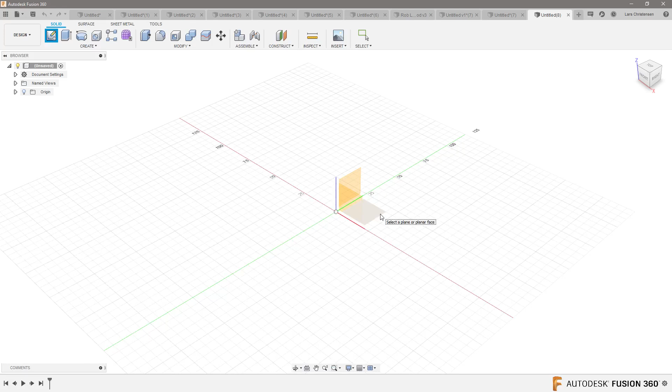Next one here is from Yasin Ergo. Yasin has been very persistent, so I wanted to make sure I touched on him. He is trying to do a canopy for a quadcopter in a parametric way. I know you're not going to be satisfied enough with my result. Sorry. He sent me this image of what he's trying to do and wants to do it parametrically. The best tip I can give you is to go into Fusion and try to do it parametrically in the sense that I would probably do a center rectangle.

And I don't know what size your quadcopter is. Let's do it 300 by 500. Draw something up like this, right? That is parametric, and I would use that. I would actually use that Rob Lockwood master modeling we just talked about earlier, and then I would go in and do the insert canvas, and I would bring in that canvas there for this, but I would do it so everything kind of matches up.

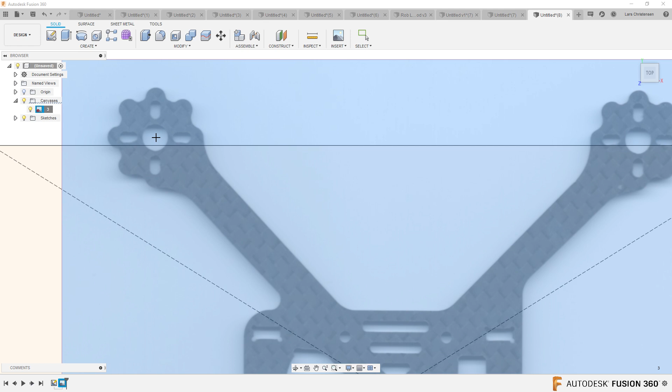So again, what did I make it, 500 I think? So again, if I go in here to the canvas, right click and calibrate, we try to be as close to these holes as possible and do that. I think I made it 500. Did I make it 500? So I would try to draw up. So that's pretty good right there. The rectangle would also have to be down to there. But I would try to use just the layout here as a reference.

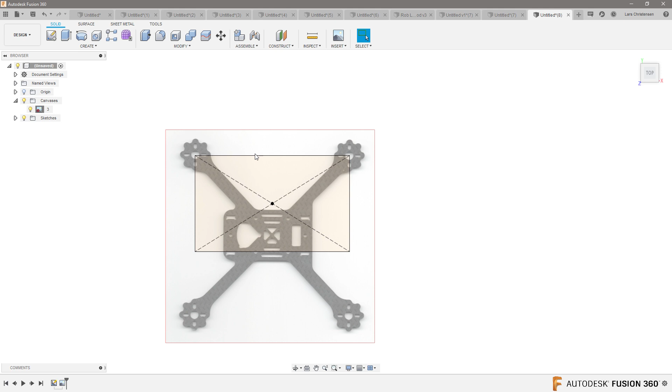And you could probably draw the center up here very detailed, and then maybe do these legs and mirror them over. So maybe even do half of it. But I would use that master modeling I talked about before that Rob is using to make sure you have some really good defined sketches, and it's going to take a little while to just start modeling them up that way. If you watch some of the other videos I've just been going through, Yasin, you would see, I think, the idea behind it.

Last one here is from John Curlsiles. Sorry if I'm mispronouncing your name, John. I generally have a shortcut for parameters on the toolbar, but since switching to the new toolbar, I'm running into an issue with getting that one up. I'm not sure what's going on, John. You might actually want to go also to the support forum, because you should absolutely be able to go to the Modify tab, find change parameters, click on the three dots, and say Pin to Toolbar, and it should show up on the toolbar.

And when you don't want it anymore, you can just drag it right off. But you should be able to go to Modify, change parameters, click on the three dots, add it to the shortcut, and that should bring it up there. If you don't see that, John, then I would recommend that you search Fusion 360 support on Google, get into the forum, and post it there.

All right, how are we doing with the lighting? Lighting's probably pretty good here. Not overexposing myself. I just heard the 3D printer stop. That means that I am going to stop on this Monday. It should actually be Sunday, but I got busy.